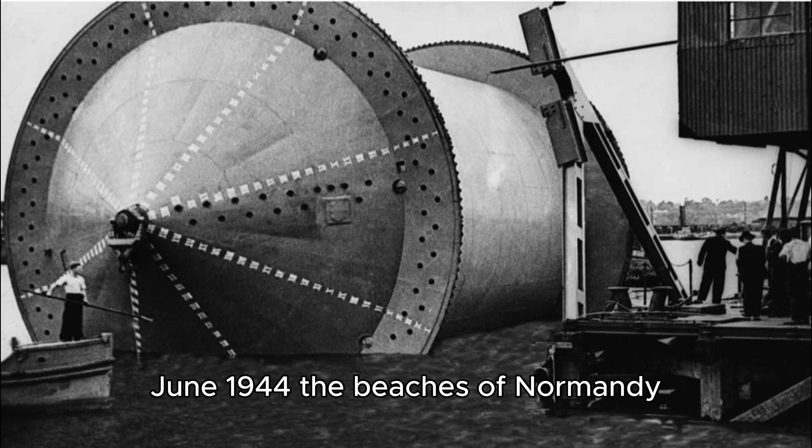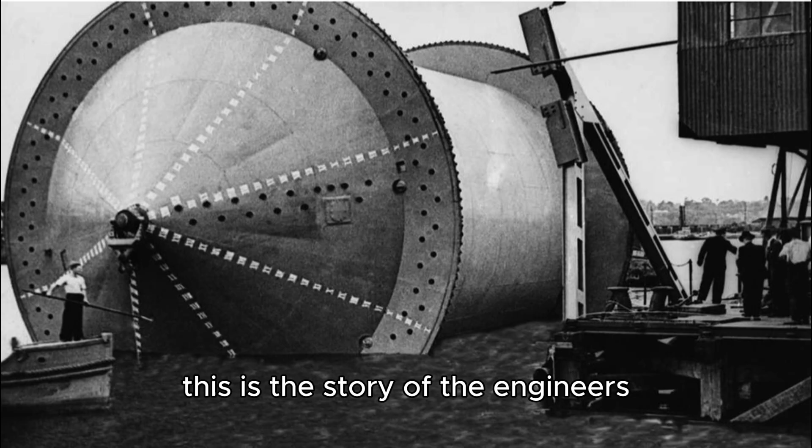June 1944. The beaches of Normandy echo with the thunder of liberation. But behind the heroes storming Hitler's fortress Europe lies another battle. A battle fought not with bullets but with fuel. This is the story of the engineers who built the impossible. A pipeline beneath the English Channel that would change the course of World War II.

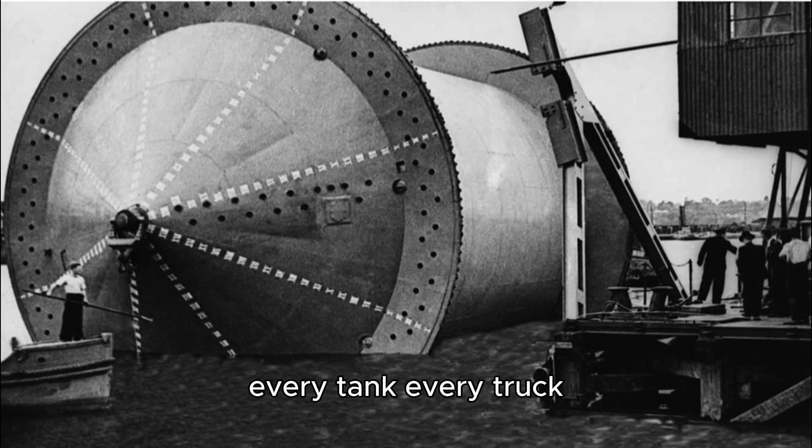In 1942, Allied commanders faced a mathematical nightmare. Every tank, every truck, every aircraft needed fuel to push into Nazi territory. Planners calculated that the invasion force would consume 1 million gallons per day. 1 million gallons every single day. Traditional supply methods using tanker ships and jerry cans would never be enough.

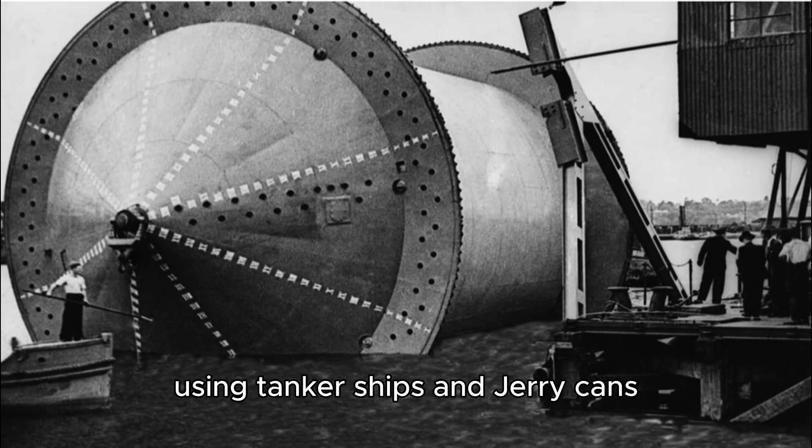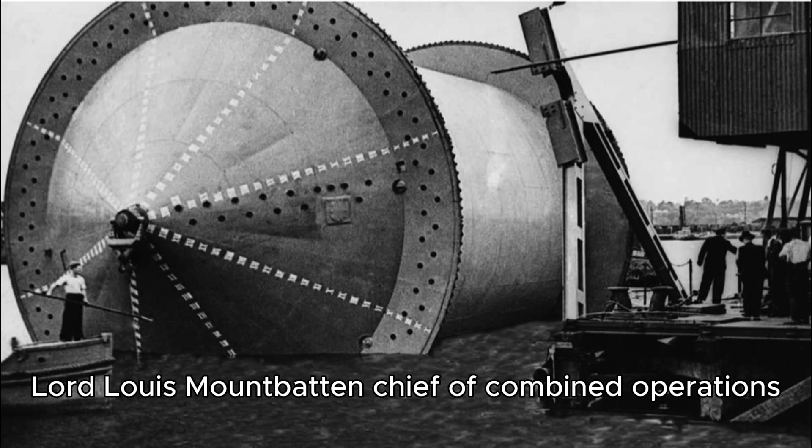German U-boats prowled the channel, turning supply vessels into floating coffins. Weather could ground operations for days, leaving armies stranded without fuel. Lord Louis Mountbatten, Chief of Combined Operations, knew they needed something radical, something that had never been attempted before.

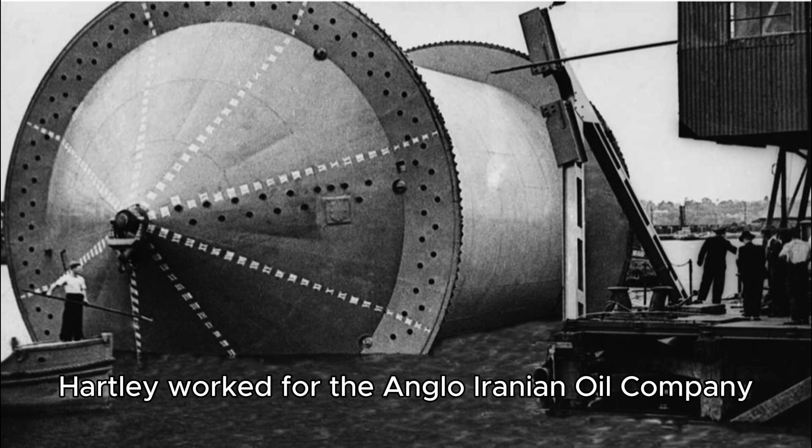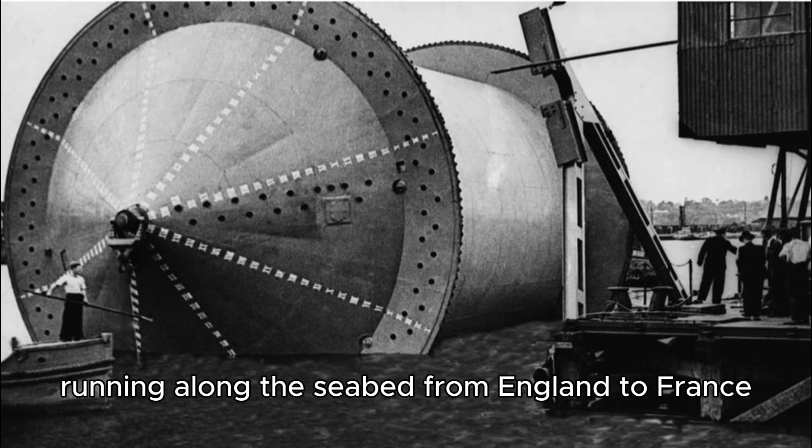The idea came from a most unexpected source, an oil company engineer. His name was Arthur Hartley. Hartley worked for the Anglo-Iranian Oil Company, later known as British Petroleum. He proposed something that sounded like science fiction, a submarine pipeline. A steel artery running along the seabed from England to France, pumping fuel directly to the armies as they advanced inland. Military brass initially dismissed it as impossible fantasy, but Mountbatten saw potential.

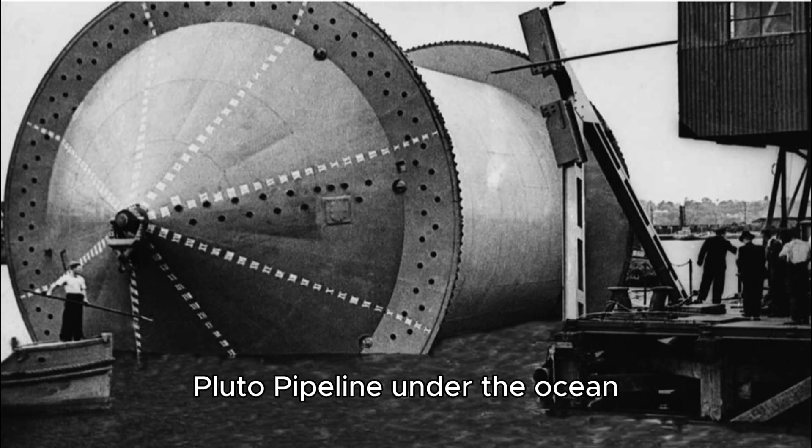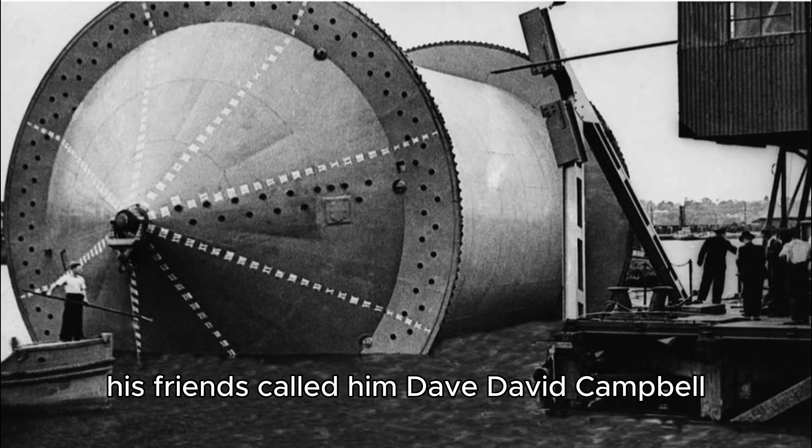He gave the project a code name, PLUTO, Pipeline Under the Ocean, and he assembled a team of Britain's most brilliant engineers to make it real. Among those engineers was a man who would become the unsung hero of Operation PLUTO. His friends called him Dave. David Campbell, a Scottish mechanical engineer with an extraordinary gift for solving impossible problems.

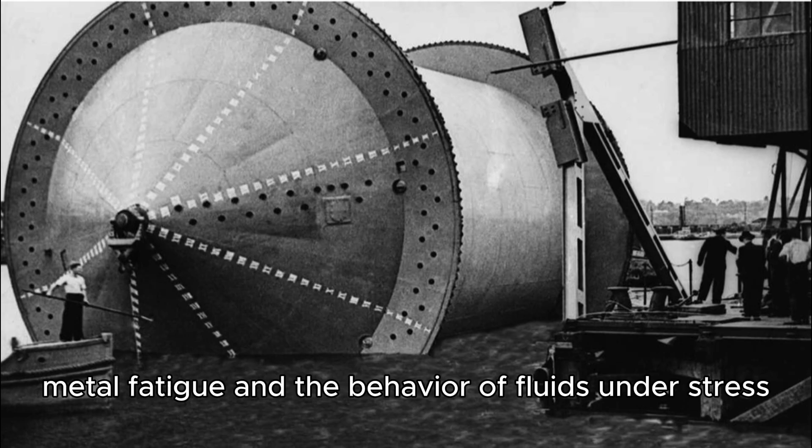Dave had spent years in the oil fields working with pipelines in brutal conditions. He understood pressure systems, metal fatigue, and the behavior of fluids under stress. But this challenge was unlike anything he'd faced. The English Channel was 70 miles of treacherous water at its widest crossing point. Depths varied wildly. Currents could tear steel cables like cotton thread.

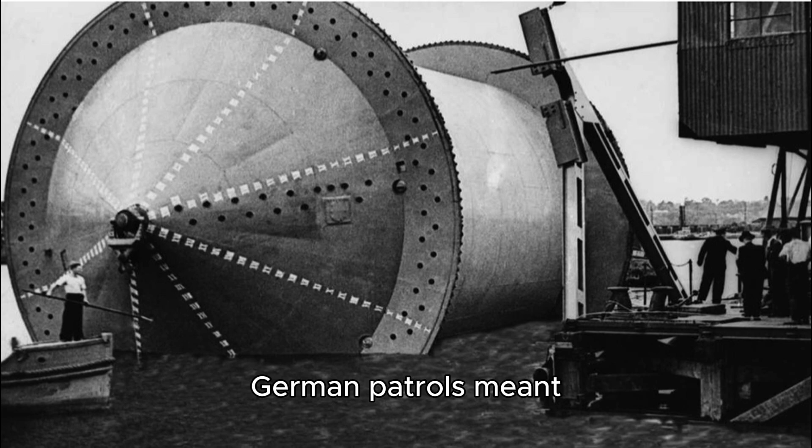German patrols meant any construction activity had to remain completely invisible, and the entire system had to be operational within 18 months of approval. Dave sat in his workshop in Liverpool, surrounded by technical drawings and calculations, chain-smoking cigarettes as he worked through the night.

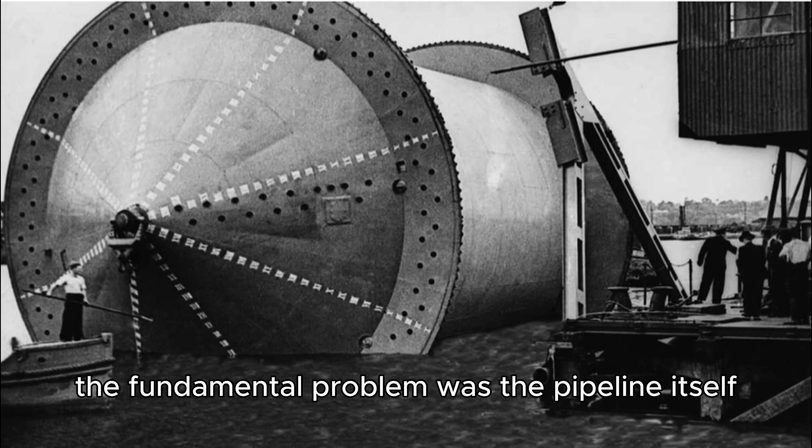The fundamental problem was the pipeline itself. Standard rigid steel pipes would crack under the immense pressure and constant movement. Ocean currents would bend them. Temperature changes would stress the metal to failure. They needed something flexible yet incredibly strong, something that could be manufactured quickly in wartime Britain.

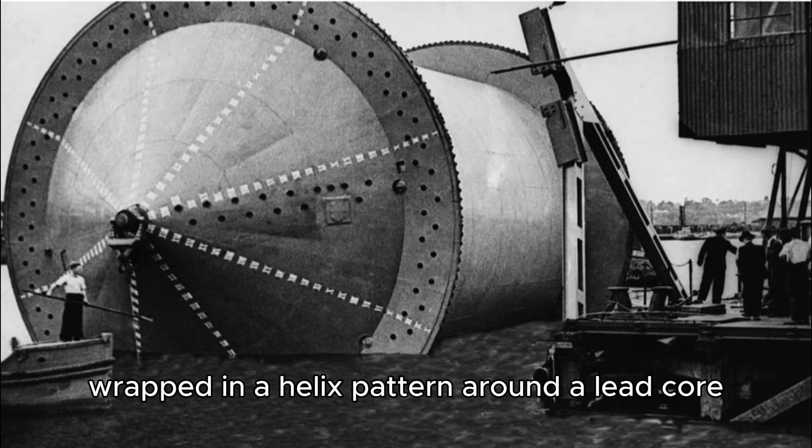Dave proposed a revolutionary design, a flexible pipeline made from layers of steel wire, wrapped in a helix pattern around a lead core, then covered in protective casing. It could bend without breaking, withstand enormous pressure, and be produced in sections. His colleagues thought he'd lost his mind. It had never been done.

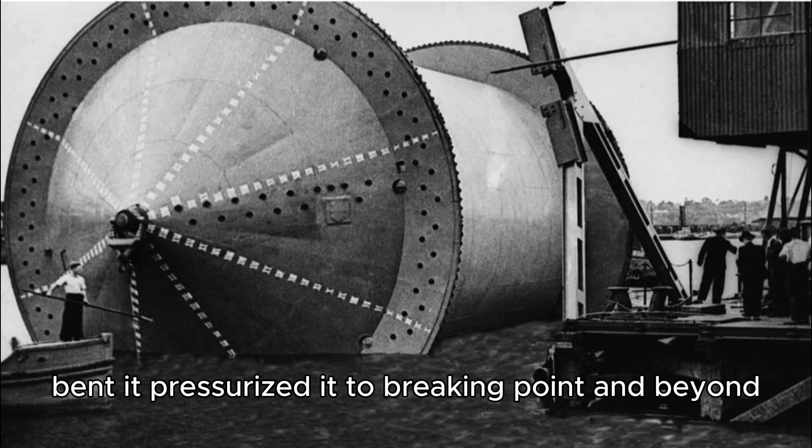But Dave built a prototype in his workshop and tested it relentlessly. He froze it, heated it, bent it, pressurized it to breaking point and beyond. The design held. It actually worked. When he presented his results to the PLUTO committee, there was stunned silence. Then approval. Dave's flexible pipeline would become the heart of Operation PLUTO.

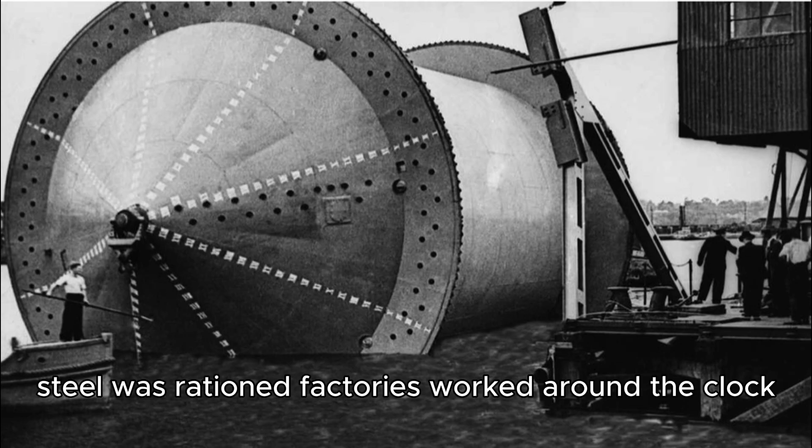But designing it was one thing. Manufacturing it was an entirely different war. Britain in 1943 was a nation under siege. Its resources stretched impossibly thin. Steel was rationed. Factories worked around the clock building tanks and aircraft. Yet somehow Dave and his team had to produce thousands of miles of specialized pipeline.

They commandeered facilities across Britain, from Glasgow to Southampton. Former textile mills were converted to wind the steel wire in precise helical patterns. Rubber factories produced the outer protective casing using scarce raw materials.

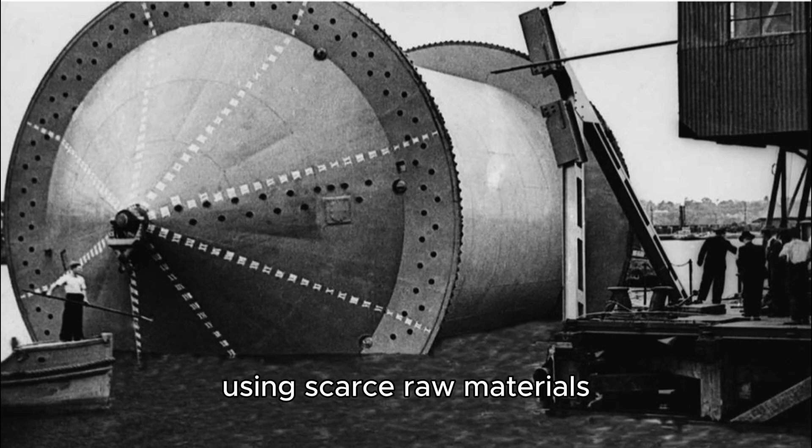Dave personally supervised the production lines, troubleshooting problems in real time. Workers called him the Ghost because he appeared everywhere, day and night, checking quality. He understood that a single flaw could doom the entire mission and countless lives.

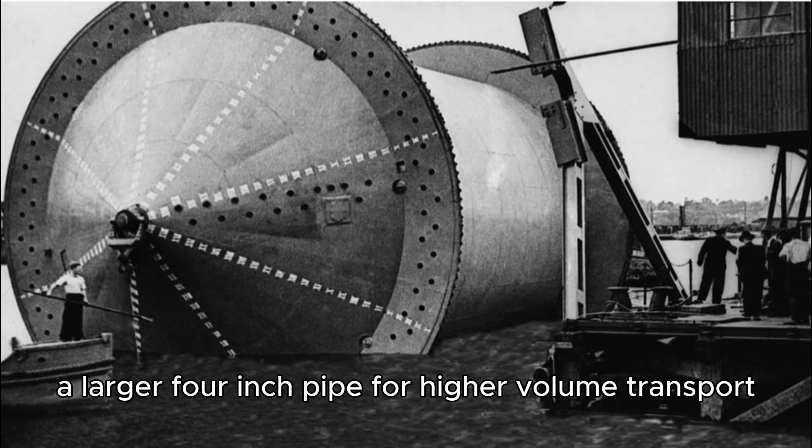Testing revealed unexpected problems that Dave solved with characteristic ingenuity. The lead core sometimes separated from the steel wire under extreme bending. Dave redesigned the bonding process, using a specialized adhesive compound he formulated. Saltwater corrosion threatened to eat through the protective casing within months.

He developed a multi-layer protection system using tar, rubber, and steel armor. By summer 1943, production was reaching 10 miles of pipeline per day, an industrial achievement that rivaled any military manufacturing effort of the war. But making the pipeline was only half the battle.

Now they had to deploy it. And for that, they needed to solve a problem that had never been tackled before. How do you lay 70 miles of pipeline on the bottom of the English Channel? Traditional pipe-laying ships were designed for calm, shallow waters and short distances. The Channel was none of those things, and German reconnaissance made surface work lethal. The PLUTO team needed a method to lay miles of pipe quickly and covertly.

Dave proposed using massive floating drums to spool and deploy the pipeline. These drums, nicknamed conundrums, would be engineering marvels in their own right. Each drum stood 40 feet tall and could hold up to 80 miles of pipeline. The pipe would be wound onto the drum in a perfect spiral at the manufacturing facility. Then the entire drum would be towed across the Channel by tugboats. As the tug moved forward, the drum would rotate, feeding pipeline to the seabed.

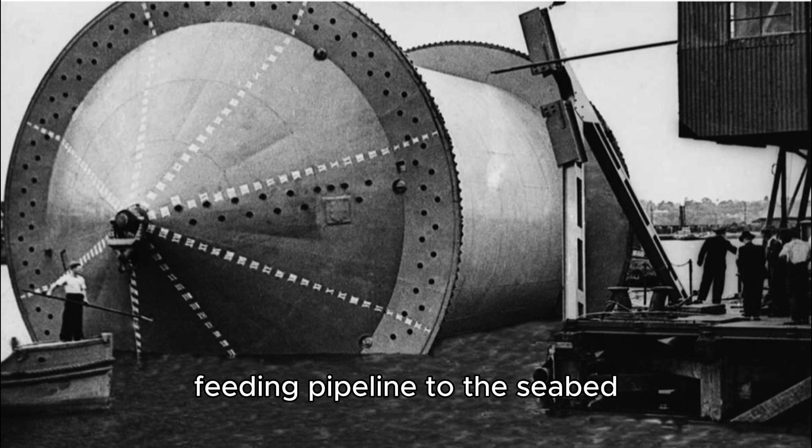Simple in concept, monumentally difficult in execution. The drums had to be perfectly balanced or they'd capsize in the Channel's rough seas. The pipe had to unspool at exactly the right rate to avoid kinking or breaking, and the entire operation had to work the first time, under combat conditions.

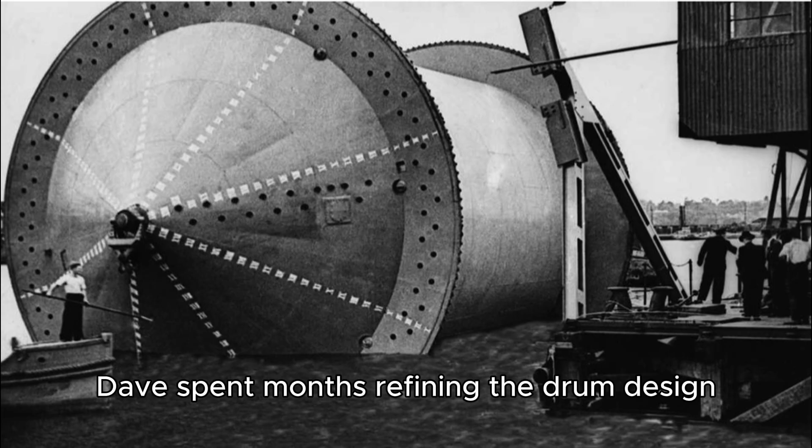Dave spent months refining the drum design, calculating rotation speeds and tensions. He built scale models and tested them in Liverpool's Albert Dock. Local children watched in fascination as strange steel drums bobbed in the water. They had no idea they were witnessing one of the war's most crucial innovations.

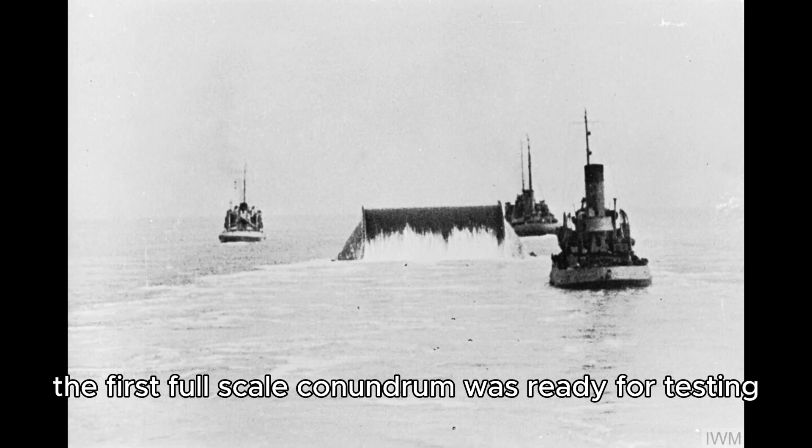By December 1943, the first full-scale conundrum was ready for testing. A 40-foot steel cylinder painted dull gray floating in a secret facility. Dave supervised as it was loaded with 10 miles of pipeline for trial runs.

The test deployment in the Irish Sea revealed problems no one had anticipated. The drum's rotation created a vortex that threatened to pull it underwater. Dave added stabilizing fins and adjusted the winding pattern to reduce turbulence. The pipe sometimes twisted as it left the drum, creating weak points and potential leaks. He designed a guide system that controlled the pipe's path from drum to seabed.

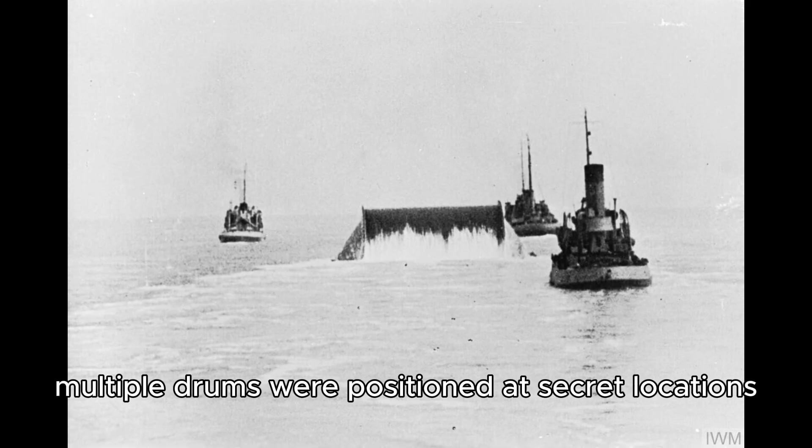By spring 1944, the conundrums were operational and proven. Multiple drums were positioned at secret locations along England's southern coast, disguised as marine equipment, hidden in plain sight from German spy planes. The pipelines were manufactured, the drums were ready. Now they needed the pumping stations to push fuel through the system. This challenge would require Dave to innovate yet again.

Pumping fuel 70 miles through a 3-inch pipe on the ocean floor required enormous pressure, far beyond what any existing petroleum pumping station could deliver. Dave calculated they needed pressures exceeding 1,800 pounds per square inch. At those pressures, fuel behaved unpredictably, heating up and expanding dangerously. A rupture anywhere in the system would create a catastrophic explosion and fire.

The pumping stations had to be built into England's coastline, heavily camouflaged. Dave worked with military engineers to construct massive concrete bunkers. From the outside, they looked like ordinary coastal defense installations. Inside, they housed some of the most advanced hydraulic equipment ever built. Multiple redundant pump systems, each capable of moving thousands of gallons per hour. Cooling systems to manage the heat generated by high-pressure fuel compression. Monitoring equipment to detect leaks or pressure drops anywhere in the pipeline.

Dave personally tested every component, pushing each system beyond its rated limits. He understood that in war, equipment always operates under worse conditions than planned. The pumps had to work perfectly in rain, fog, under bombing, and during storms. Failure wasn't just an engineering problem. It meant soldiers dying for lack of fuel.

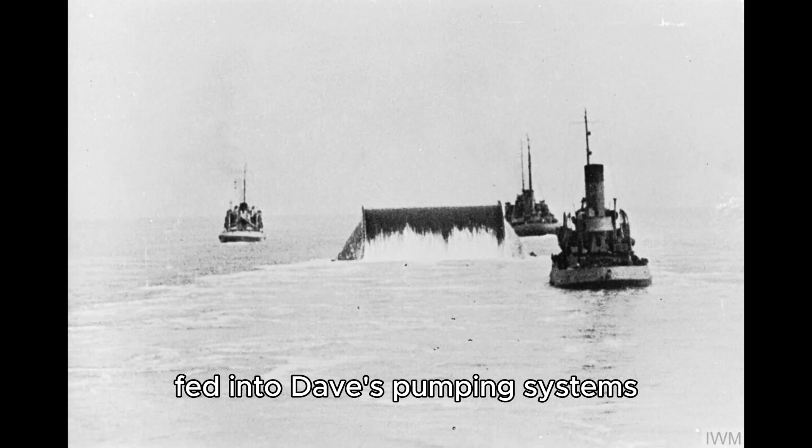By May 1944, pumping stations were operational at Sandown on the Isle of Wight and at Dungeness in Kent, both locations chosen for their proximity to France. Storage tanks holding millions of gallons fed into Dave's pumping systems. Everything was ready, D-Day was approaching, but Dave knew the real test would come when they laid the pipeline under fire. In the first days of June 1944, southern England became an armed camp.

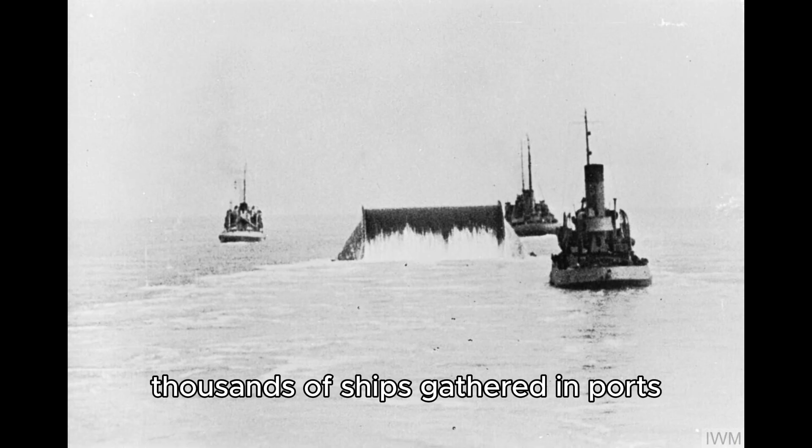Thousands of ships gathered in ports. Hundreds of thousands of troops prepared to embark. Operation Overlord, the invasion of Normandy, was about to begin. Dave and his team waited at the pumping stations, knowing their moment would come. But first, the infantry had to establish a beachhead secure enough for pipeline operations.

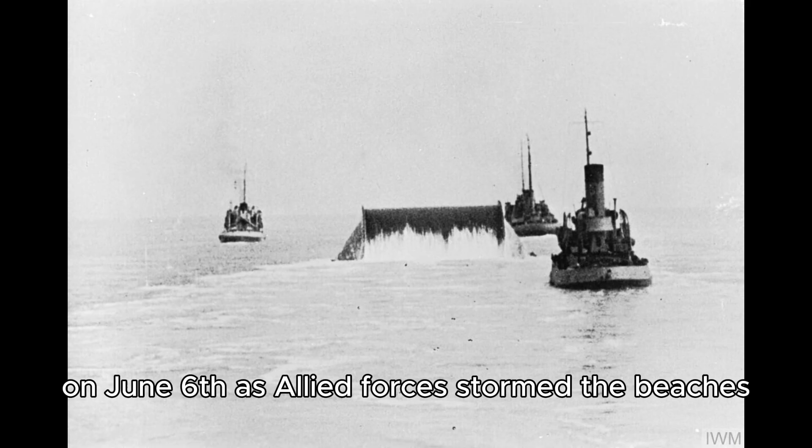On June 6th, as Allied forces stormed the beaches, Dave listened to reports. Heavy casualties at Omaha, success at Utah and Sword, progress at Gold and Juno. The invasion was holding, but fuel was already becoming a critical concern. Ships shuttled jerry cans across the channel, a desperate and inadequate supply method. Every hour of delay meant Allied tanks sitting idle while German reinforcements arrived. PLUTO had to become operational as soon as humanly possible.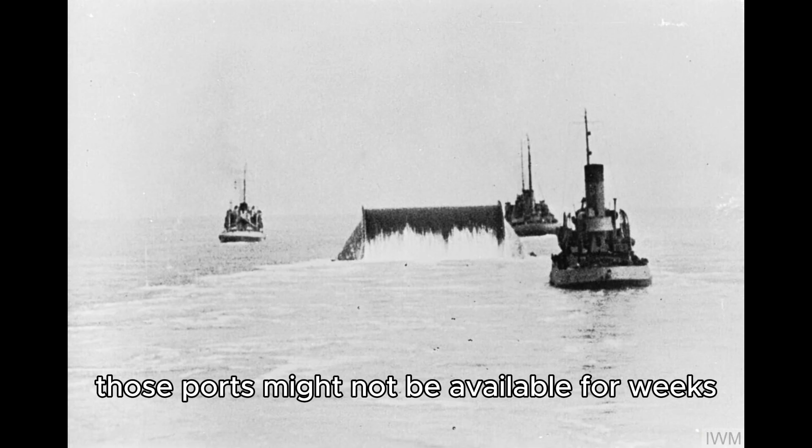The original plan called for waiting until French ports were captured and secured, but the intensity of fighting meant those ports might not be available for weeks. Allied commanders made a bold decision: lay pipeline directly to temporary beach facilities. This meant laying pipe through waters still contested by German naval forces. Past mines, through areas patrolled by U-boats and E-boats.

Dave volunteered to accompany the first pipeline deployment operation himself. His superiors tried to dissuade him. He was too valuable to risk in combat. But Dave insisted. If problems arose during deployment, he needed to be there. No one else understood the system as thoroughly or could improvise solutions as quickly.

On June 12th, the first Conundrum drum was towed out of Southampton. Dave stood on the deck of the lead tugboat, watching the massive drum float behind them. It contained 70 miles of pipeline, wound perfectly over months of patient work. Everything his team had designed, built, and tested was about to face reality.

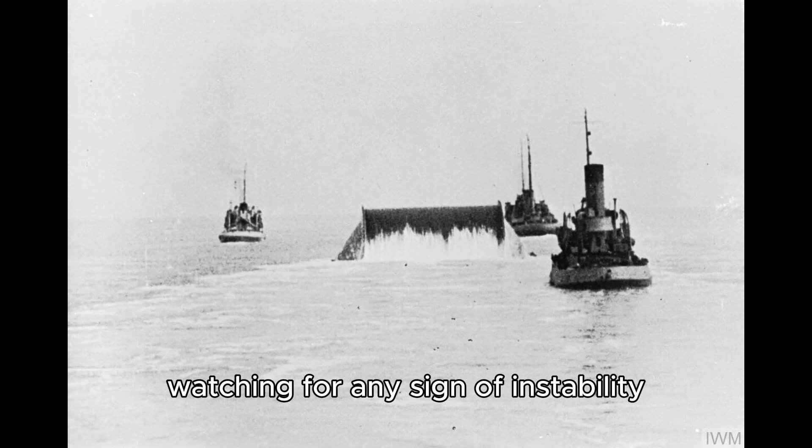The channel crossing began in fog, which provided cover, but it also meant they couldn't see threats until they were dangerously close. Dave stood at the rail, smoking cigarette after cigarette, eyes on the drum, watching for any sign of instability, any indication the system was failing. The drum turned smoothly, pipeline feeding into the channel. Behind them, a steel thread connected England to France, a lifeline that would fuel the liberation of Europe.

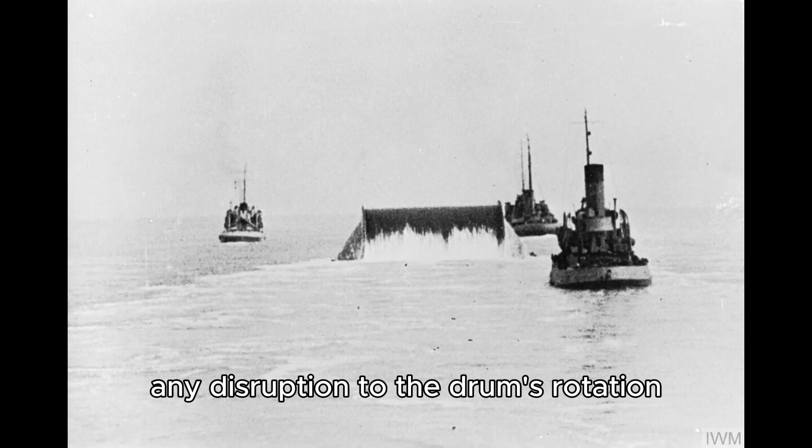If it survived the next 12 hours. 4 hours into the crossing, German coastal artillery spotted the unusual convoy. Shells began falling, throwing up towers of water uncomfortably close to the tugboats. The convoy couldn't speed up without risking damage to the pipeline deployment. Dave watched as the Conundrum drum continued its steady rotation, oblivious to danger. A near miss rocked the tug violently. Crew members took cover, but Dave remained at his station, monitoring the pipeline's feed rate and tension. Any disruption to the drum's rotation could kink the pipe or cause it to snap.

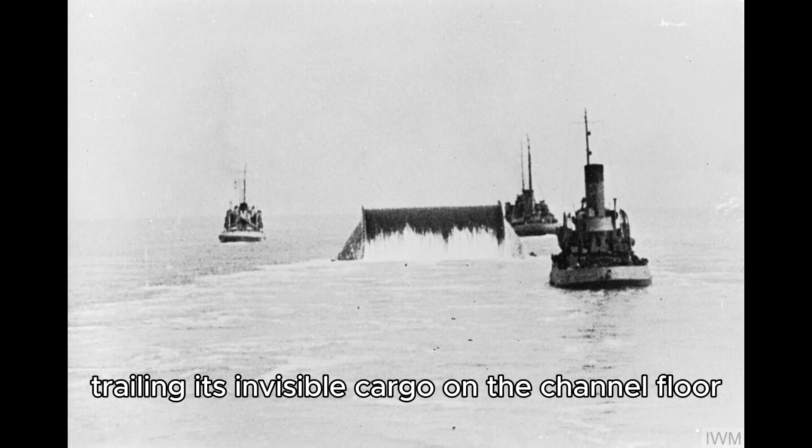Allied destroyers laid down suppressing fire, silencing some of the German guns. The convoy pressed forward, trailing its invisible cargo on the channel floor. Then new danger emerged, a periscope breaking the surface 300 yards away. A German U-boat had detected the unusual surface activity and moved to investigate. If it attacked the Conundrum, 70 miles of pipeline would be lost, months of work destroyed, and PLUTO potentially compromised as a strategic asset. Allied escort vessels launched depth charges, forcing the U-boat to dive deep and retreat. The pipeline deployment continued uninterrupted.

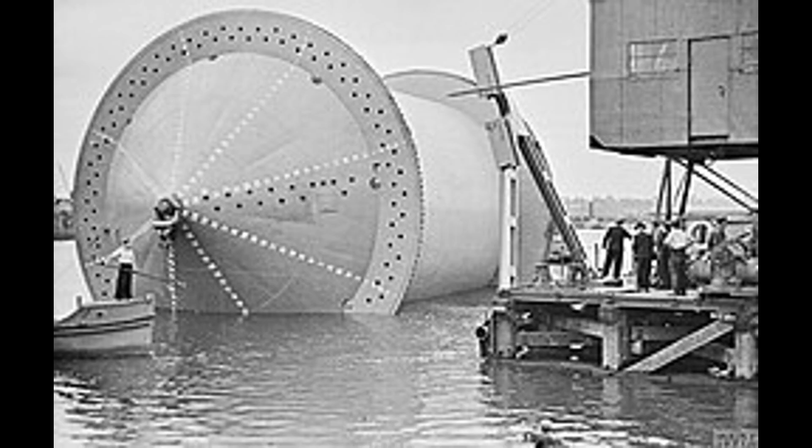As they approached the French coast, Dave saw the beaches of Normandy for the first time, still scarred from combat, littered with wreckage but firmly in Allied hands. Engineers had prepared a receiving station, a temporary facility protected by sandbags. The final section of pipeline was manhandled from the surf to the connection point. Dave supervised the coupling personally, checking every seal and valve. 14 hours after leaving Southampton, the connection was complete.

Now came the moment of truth, pumping fuel through the system for the first time. Dave radioed back to England. The pumping station operators began their sequence. Pressure built slowly, carefully, watching for any sign of failure. 500 psi, 1,000 psi, 1,500 psi. Somewhere beneath the English Channel, fuel was flowing through Dave's pipeline. At the French receiving station, they watched the gauge that would confirm success. Seconds ticked by, then minutes. Had the pipeline failed somewhere mid-channel?

Suddenly, the pressure gauge at the French end jumped. Fuel was flowing. PLUTO was operational. The engineers erupted in cheers. Some wept openly. Dave allowed himself a brief smile before turning back to his monitoring equipment. The system was working, but they needed to verify stability over hours and days. Verify it could maintain flow through storms, pressure changes, and temperature shifts. The first pipeline was just the beginning.

They would need many more. With the first pipeline proven operational, the PLUTO team began an aggressive expansion. Multiple pipelines were laid in quick succession, creating redundancy and increased capacity.

From Dungeness to Ambleteuse near Calais, as Allied forces captured more French coast. From Shanklin on the Isle of Wight to Cherbourg once that vital port was secured. Each deployment brought new challenges that Dave and his team had to overcome in real time.

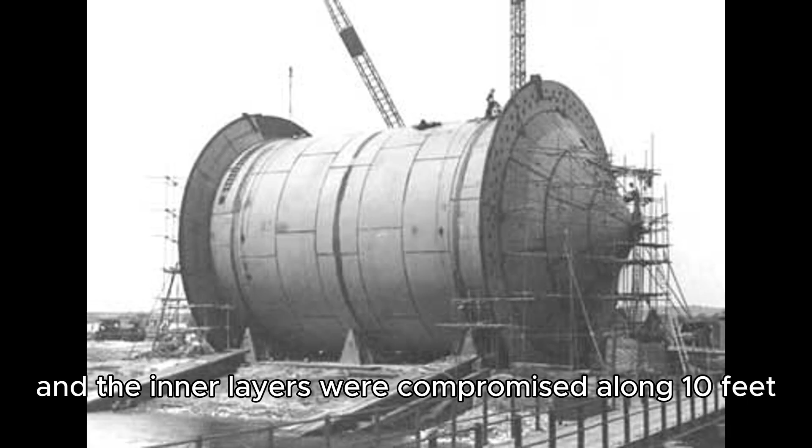The first dive team found the rupture after 3 hours of searching in the murky water. A section of pipeline had been damaged, possibly by a piece of unexploded ordnance. The protective casing was torn open, and the inner layers were compromised along 10 feet. Standard procedure would be to abandon the pipeline and lay a new one. But Dave calculated they couldn't afford to lose this pipeline's capacity. Allied forces were preparing for a major offensive, and every pipeline mattered.

He designed an emergency repair procedure that had never been attempted underwater. A sleeve system that would be clamped around the damaged section and sealed with compound, then reinforced with steel bands and covered with protective material against corrosion. The work required divers to make multiple descents in challenging conditions. Each dive was limited to 15 minutes before hypothermia became life-threatening. Dave coordinated from a surface vessel, tracking progress and adjusting procedures.

After 16 hours of continuous effort, the repair was complete. Pumps were restarted slowly. Pressure built gradually, everyone holding their breath. The repair held. Pressure stabilized at operational levels. The pipeline that should have been abandoned was back in service within 24 hours. This repair technique became standard procedure for future pipeline maintenance. Another of Dave's innovations that would outlive the war itself.

But the incident highlighted the system's vulnerability and the constant threat of failure. Every pipeline was operating at the edge of its design limits under wartime conditions. The miracle wasn't that problems occurred, but that they occurred so rarely, a testament to Dave's engineering excellence and the dedication of his team. As 1944 gave way to 1945, Pluto faced its harshest test, winter in the Channel.

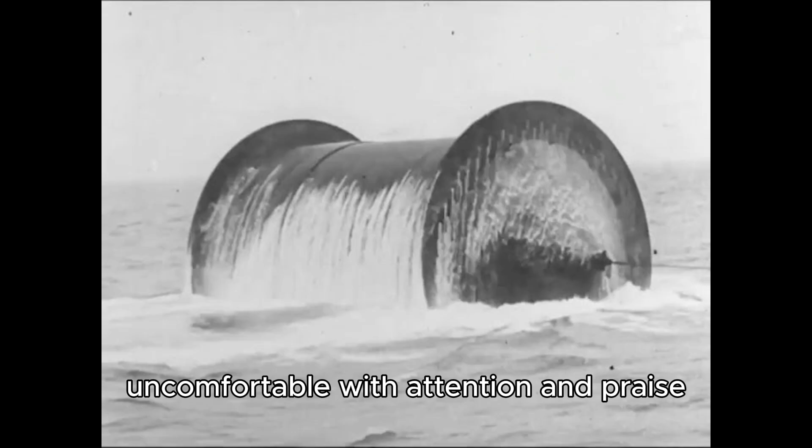When reporters sought him out, he directed them to his team members instead, insisting that PLUTO was a collective achievement, not the work of any individual. He was offered prestigious awards and honors, most of which he declined. He accepted only those that could be shared with his entire engineering team. His colleagues from the war years would later describe Dave as brilliant but humble, a man who measured success not in accolades but in problems solved, in systems that worked when they were needed most.

The British government eventually awarded him an OBE, Order of the British Empire, for services to military engineering, though the citation was deliberately vague. Much of PLUTO's technical details remained classified for years after the war. Dave attended the ceremony, shook hands with dignitaries, then returned to civilian work. He never spoke publicly about his wartime service unless directly asked. And even then, he focused on the technical challenges rather than his own contributions. To him, PLUTO was simply a job that had needed doing, and he had done it to the best of his considerable ability.

The technological innovations developed for Operation PLUTO didn't end with the war. Dave's flexible pipeline design revolutionized the petroleum industry worldwide. Post-war, his wire-wound construction method was adapted for civilian applications. Undersea pipelines began connecting offshore oil platforms to mainland facilities. His pressure monitoring and remote sensing systems became industry standard, preventing countless leaks and failures in petroleum infrastructure globally. The underwater repair techniques developed during that October 1944 crisis became the foundation for modern submarine pipeline maintenance procedures.

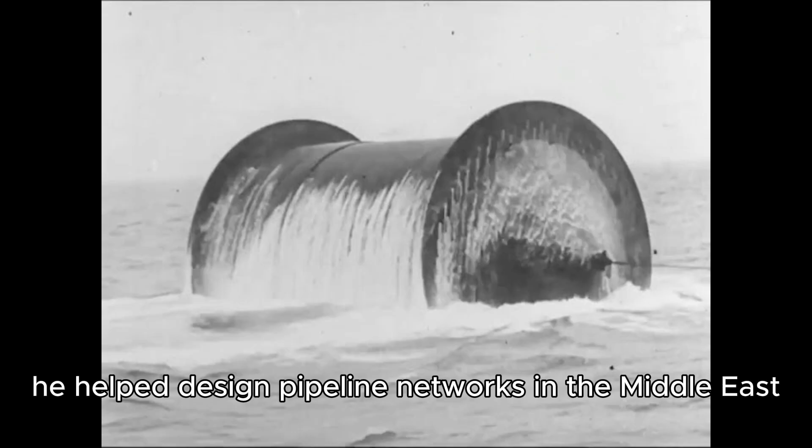Even the conundrum drums found post-war applications. The concept of large-scale cable and pipeline spooling systems was adapted for laying telecommunications cables across oceans and oil pipelines in remote regions. Dave himself returned to the petroleum industry after the war, working as a consulting engineer for major pipeline projects around the world. He helped design pipeline networks in the Middle East, Southeast Asia, and South America, always insisting on the highest safety and reliability standards. His wartime experience had taught him that engineering failures cost lives.

Even in peacetime, poorly designed systems could kill workers and devastate communities. He became known as an engineer who would never compromise on safety, even if it meant walking away from lucrative contracts. Young engineers sought him out for mentorship, drawn by his reputation for excellence. Dave taught them not just technical skills but professional ethics, the responsibility that comes with designing systems that people depend on. Many of his mentees went on to distinguished careers in engineering, carrying forward the principles Dave had demonstrated during Operation PLUTO: innovation driven by necessity, quality that never compromises, humility in success and perseverance through failure.

These became the hallmarks of what colleagues called the PLUTO standard. By late 1945, most of PLUTO's pipelines were being systematically shut down. The emergency conditions that had necessitated their construction no longer existed. European ports were functioning again, and conventional fuel supply chains were restored.

The massive pumping stations were decommissioned, their equipment sold or repurposed. The Conundrum drums were cut up for scrap metal, their steel needed for reconstruction. The pipelines themselves presented a unique challenge in decommissioning. Attempting to recover them from the Channel floor would be expensive and difficult. Most were simply flushed clean, sealed at both ends and left in place, where they remain to this day, buried in Channel sediment, silent testament to an extraordinary engineering achievement.

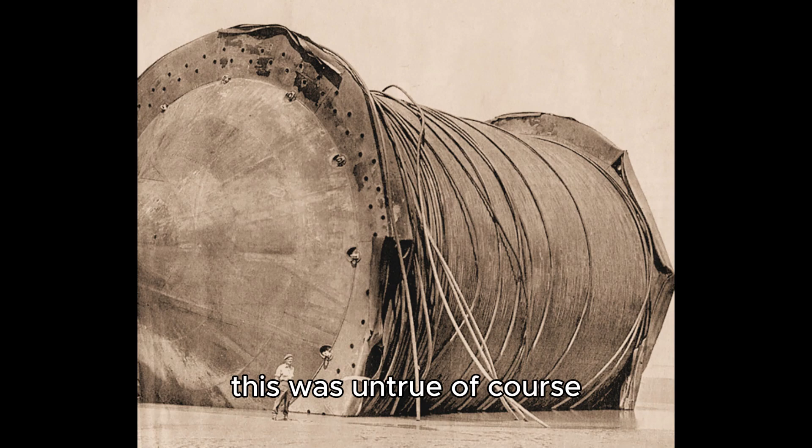His interviewer pressed him about the technical brilliance of the flexible pipeline design. Dave shrugged it off. It was the obvious solution once you understood the constraints. Any competent engineer would have arrived at something similar. This was untrue, of course. Dave's design was revolutionary, but he genuinely believed that he'd simply done his job, that the war had required a pipeline and he'd built one. This humility endeared him to colleagues but frustrated historians, who recognized that Dave's contributions deserved far greater recognition.

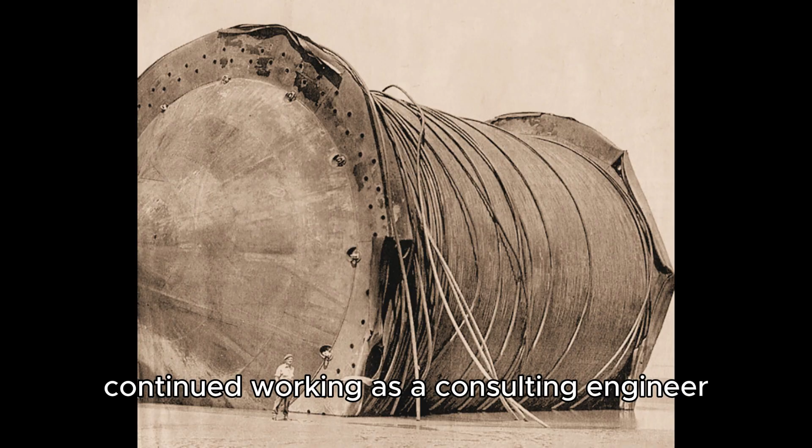Dave Campbell continued working as a consulting engineer well into his 60s. His reputation had spread throughout the petroleum industry worldwide. Companies sought his expertise for the most challenging pipeline projects. He never lost the work ethic that had defined his wartime service, still putting in long hours, still obsessing over every technical detail, still chain-smoking cigarettes while poring over engineering drawings. He married in 1948 to a woman named Elizabeth who had worked as a code breaker. She understood the peculiar intensity of wartime service and its lasting effects.

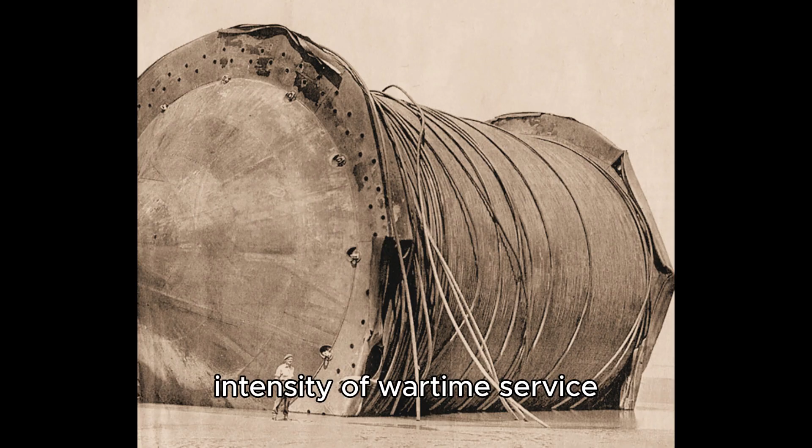They had 2 children, both of whom would eventually become engineers themselves, though Dave never pressured them toward that career path. In his personal life, Dave was quiet and reserved, preferring small gatherings to large social events. He rarely spoke about his war service at home. His children didn't learn the full extent of his contributions until they were adults.

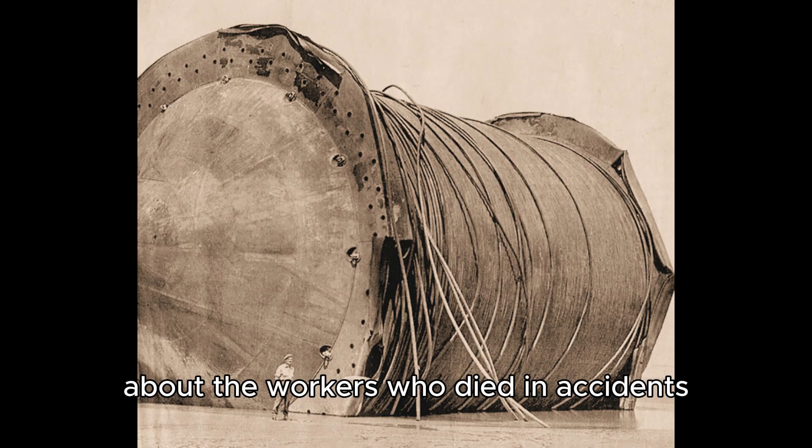He suffered from what we'd now recognize as post-traumatic stress. Nightmares about pipeline failures, about fuel running out at critical moments, about the workers who died in accidents during construction. Elizabeth helped him through these difficult periods with patience and understanding. Dave found solace in continued engineering work, in solving new problems. Each successful project was a small affirmation that his skills still mattered.

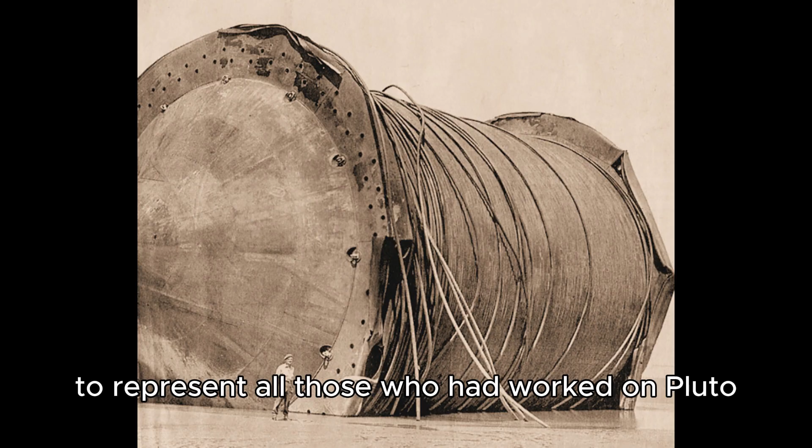In 1964, on the 20th anniversary of D-Day, Dave was invited to a commemoration ceremony in Normandy. He initially declined, uncomfortable with public recognition, but Elizabeth convinced him to attend, arguing that he owed it to his team, to represent all those who had worked on Pluto. Standing on those beaches 2 decades after the invasion, Dave was overcome with emotion for one of the few times in his adult life.

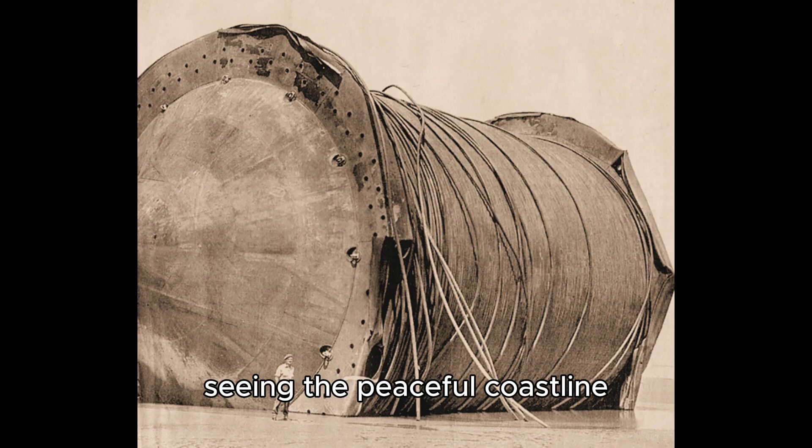Seeing the peaceful coastline, the memorials to the fallen, the French families living normal lives thanks to the liberation, it brought home the meaning of all those sleepless nights and impossible challenges. Pluto hadn't just been an engineering project. It had been a contribution to human freedom.

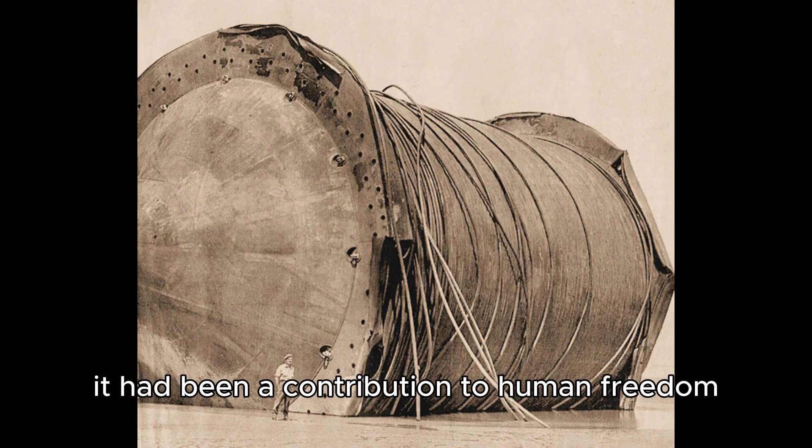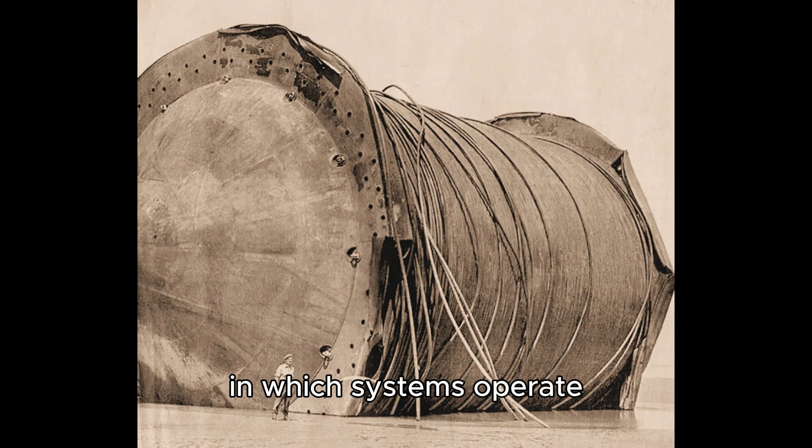Chapter 18. Engineering Philosophy. Throughout his post-war career, Dave developed a philosophy of engineering based on the lessons learned during Operation Pluto. He believed that engineering wasn't just about technical excellence, but about understanding the human context in which systems operate. "Design for the worst conditions, not the average ones," he would tell students. "Your system will face storms, failures, and human error. It needs to be robust enough to survive all of that."

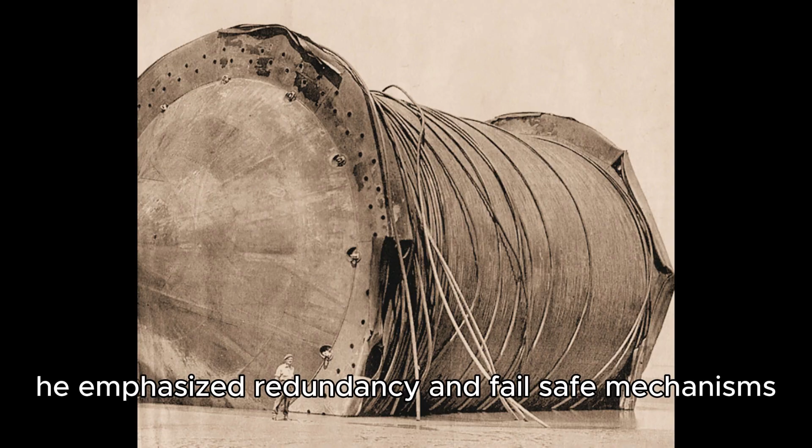He emphasized redundancy and fail-safe mechanisms in all his designs. Multiple backup systems, automatic shutdowns, pressure relief valves. Pluto had taught him that systems operating at their limits needed protection. Dave also believed deeply in the importance of maintenance and monitoring. "A system is only as good as the people who maintain it," he often said. He designed his post-war projects with maintenance accessibility as a priority. Not just theoretical maintainability, but practical access for real workers, with real tools and real-world conditions.

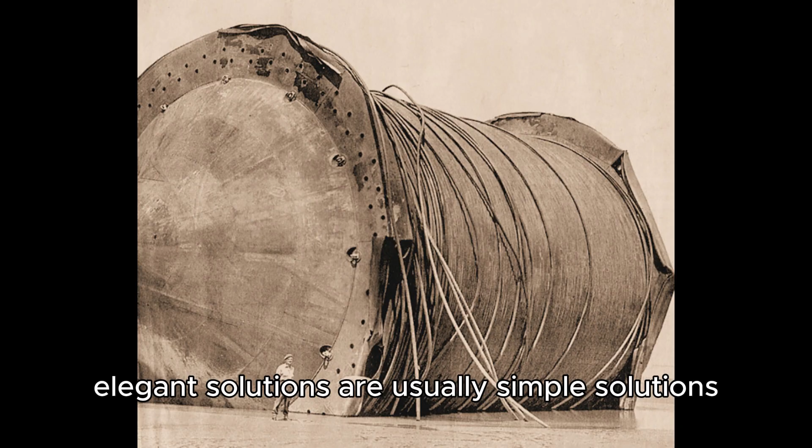He was deeply opposed to unnecessary complexity in design. "Elegant solutions are usually simple solutions," he wrote in a technical paper. "Complexity creates failure points, simplicity creates reliability." This didn't mean his designs were unsophisticated. Rather, he had a gift for reducing complex problems to their essential elements, then solving those elements in the most straightforward way possible.

Perhaps most importantly, Dave believed in the ethical responsibility of engineers. "When you design a bridge, you're responsible for every person who crosses it. When you design a pipeline, you're responsible for every community it passes through. That responsibility never ends, and you must never forget it." He refused to work on projects where safety was compromised for profit, where environmental considerations were ignored, or where proper maintenance budgets were not allocated. This stance cost him some lucrative contracts over the years, but earned him respect throughout the engineering community.

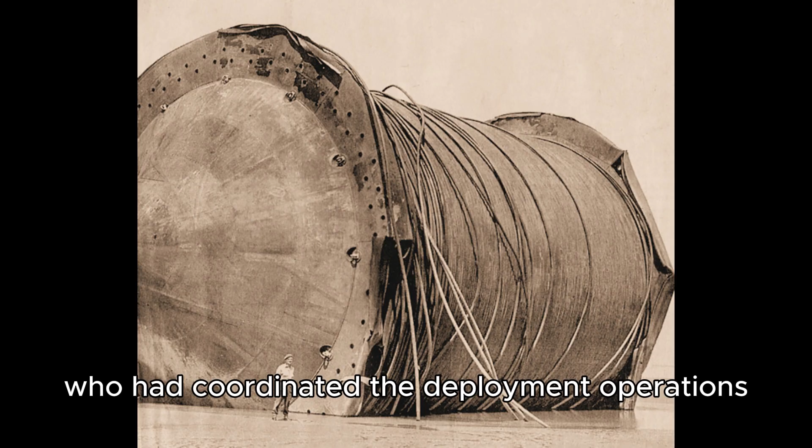In 1974, 30 years after D-Day, a reunion was organized for those who had worked on Operation Pluto during the war. It was held at a hotel in Southampton, near where the first conundrum had been deployed. Dave attended reluctantly, still uncomfortable with gatherings focused on past achievements. But he was curious to see old colleagues, to learn what paths their lives had taken. Over 100 people gathered: engineers, pump operators, factory workers, military personnel who had coordinated the deployment operations. They were older now, grayer, but the bonds formed under wartime pressure remained strong.

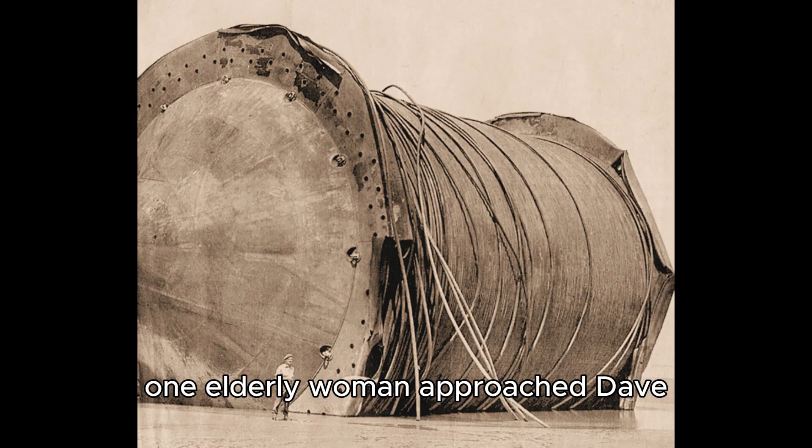Stories were shared late into the night, memories that had been private for decades: the terror of laying pipeline under German artillery fire, the exhaustion of 18-hour shifts in freezing pumping stations, the pride of seeing the system work despite all predictions of failure. One elderly woman approached Dave with tears in her eyes. She had worked in a Liverpool factory winding wire for the pipeline. She told him she'd never known if her work had mattered, if those endless hours had contributed to anything meaningful.

Dave took her hands and told her that without her work, without every worker, the pipeline would never have existed and the war might have lasted longer, that her contribution had mattered more than she could possibly know. The woman embraced him, sobbing, finally receiving the acknowledgement she had waited 3 decades to hear.

That moment crystallized something for Dave: the importance of recognizing every contribution, no matter how small it seemed. Great achievements were never the work of individuals. They were the sum of thousands of people doing their best.

At the reunion's conclusion, Dave gave a brief speech, the only public address he ever made about Operation Pluto. He spoke about the ordinary people who had done extraordinary things, about the power of collective effort focused on a common goal, about the privilege of having served alongside such dedicated individuals. When he finished, there wasn't a dry eye in the room.

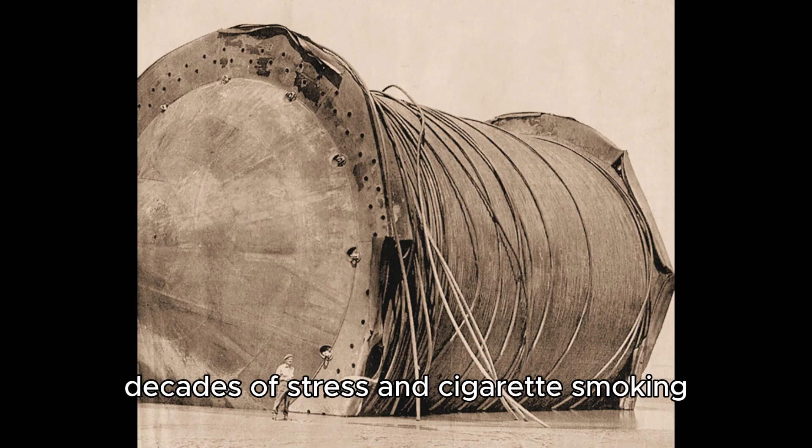Dave Campbell retired from active engineering work in 1978, though he continued consulting on particularly challenging problems until the mid-1980s. His health had declined, decades of stress and cigarette smoking taking their toll. But his mind remained sharp, his passion for engineering undiminished. He spent his retirement years writing technical papers and mentoring young engineers, passing on the knowledge accumulated over a remarkable career. He and Elizabeth traveled, visiting places they'd never had time to see.

During one trip to France, they visited the Normandy beaches again. Dave walked along the coastline, imagining where the pipeline had come ashore. How different these peaceful beaches looked from the war-torn shores of 1944. He was approached by a young French man who had seen them at the memorial. The man's grandfather had been liberated from a Nazi labor camp by Allied forces whose advance had been fueled by PLUTO. He thanked Dave with a passion that transcended language barriers. Dave accepted the thanks with his characteristic humility, but privately he was profoundly moved by this tangible connection between his wartime work and a life saved, a family continued.

In 1989, Dave Campbell passed away at the age of 78. His obituary in the Times mentioned Operation PLUTO prominently, but Dave would have preferred it focus on his family and his post-war work, the things he'd accomplished in peace, not just in war. His funeral was attended by hundreds: engineers from around the world, former colleagues from PLUTO, now elderly themselves, students he'd mentored who had gone on to distinguished careers. They remembered not just his technical brilliance, but his integrity, his humility, his unwavering commitment to doing things right.